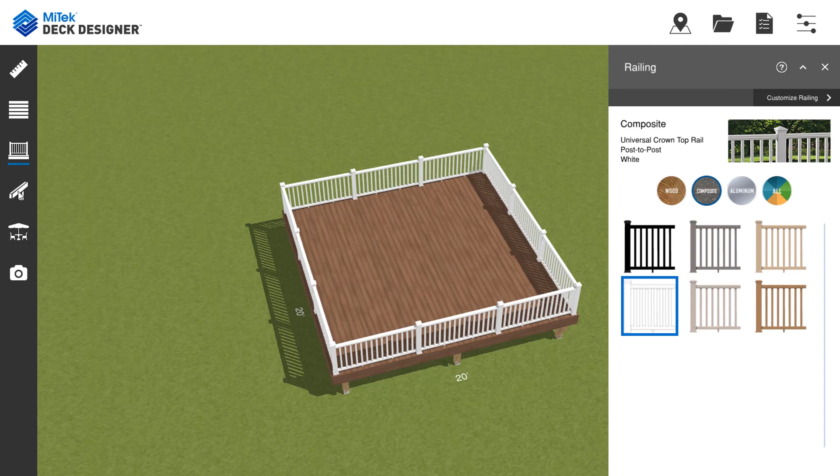MiTek Deck Designer is a free online interactive program that will help you quickly and easily design deck projects of all sizes. MiTek Deck Designer is easy to learn, easy to use, and allows for customization of the deck design with easy-to-navigate menu options.

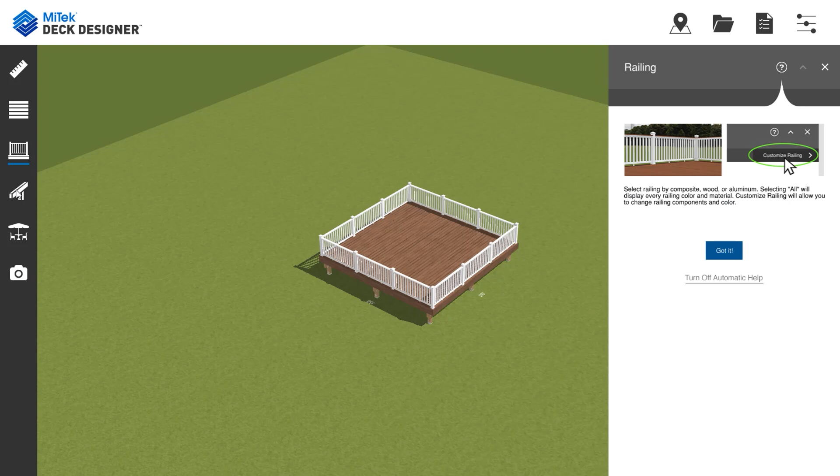The left navigation menu is easily accessible and conveniently arranged in the typical order of a deck design project. The settings menu allows you to set many aspects of the deck design. Here you can set preferences for footing depths, live and dead load values, and even set preferred joist spacing.

To demonstrate just how easy it is to design a deck using MiTek Deck Designer, let's start with a 20 by 20 deck. Drag any of the push-pull points that are highlighted around the deck to adjust the size.

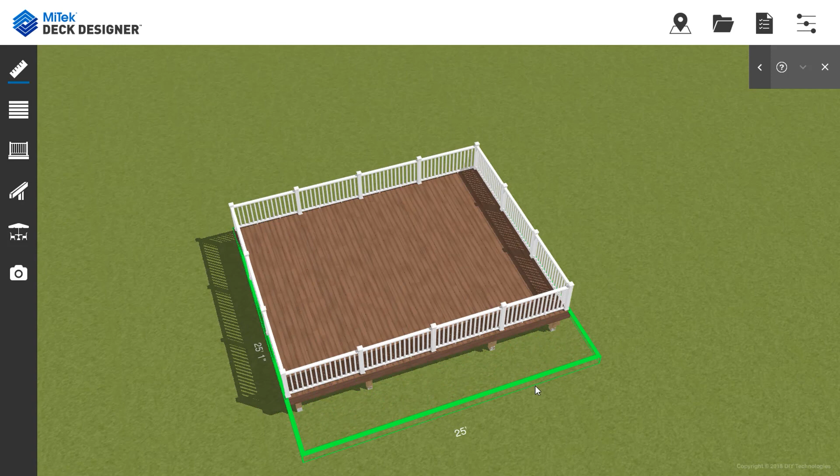Next, select the Set Deck Height tab from the Design menu. Deck heights are in 6-inch increments ranging from 2 feet to 12 feet.

Perimeter shaping tools provide quick options for modifying corners and edges. Options include common perimeter details that, when selected, automatically adjust the railings as well as the structural framing for the deck, including curves and angles. Select any option, then pick the placement point on the deck design.

Interior shaping tools allow for the creation of openings in the deck for trees, pools, or spas by simply dragging and dropping the selection on the deck design. Adjust any of these design elements using the push-pull points.

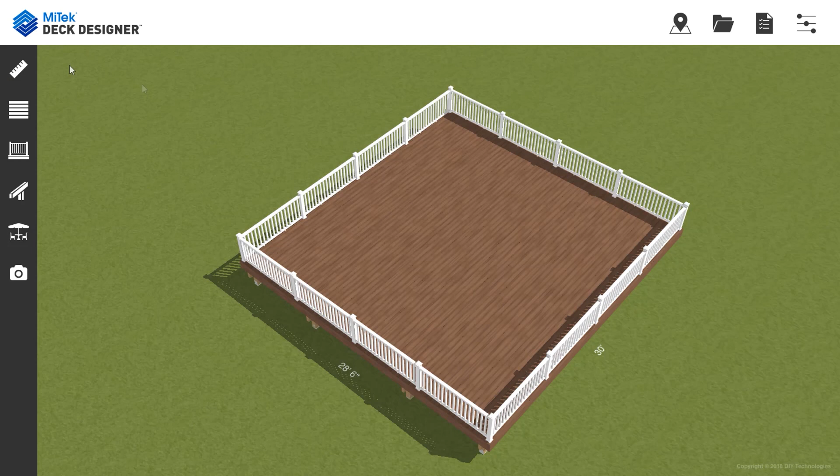Create a second level to your deck design with stepped up or stepped down options.

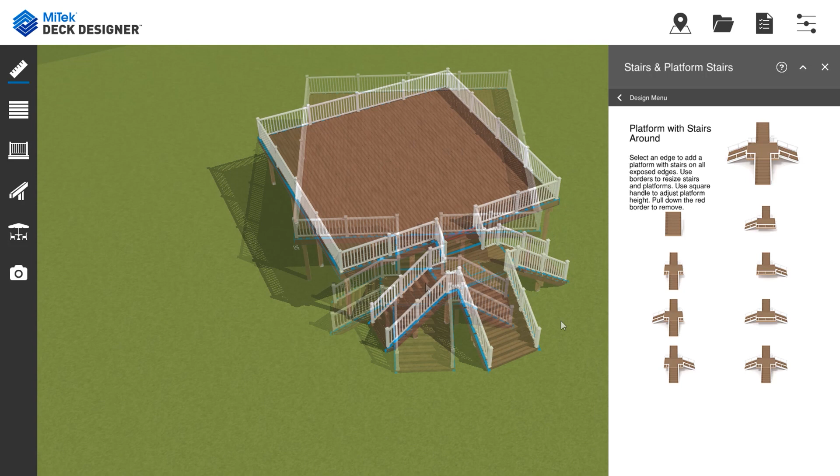Stair locations are easy to create and modify. Select from multiple stair designs, including stairs with landings. Then select the desired edge where the stairs are to be added. To size the stairs, simply click and drag any of the push-pull points in the design window. Landing heights can be adjusted by using the center pull point.

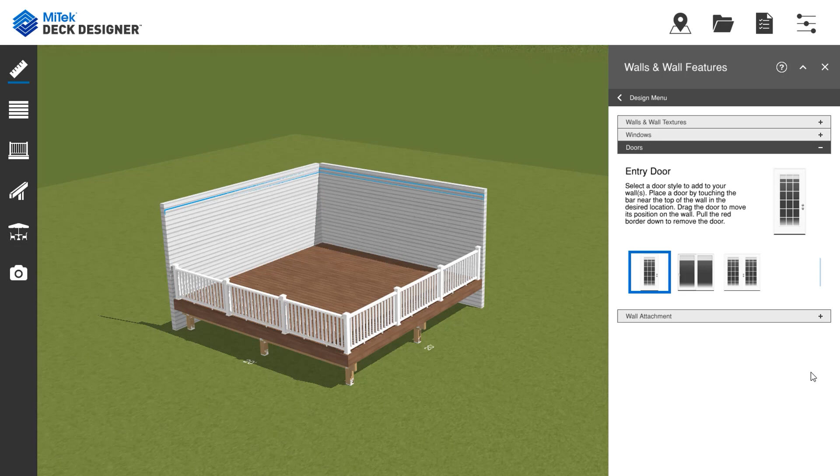Walls can be added with just a couple of clicks of the mouse. Determine whether the deck is to be attached to the house or freestanding. There are several common exterior wall types available to choose from in a variety of styles and colors. Doors and windows can be added to wall sections to help you better visualize the project.

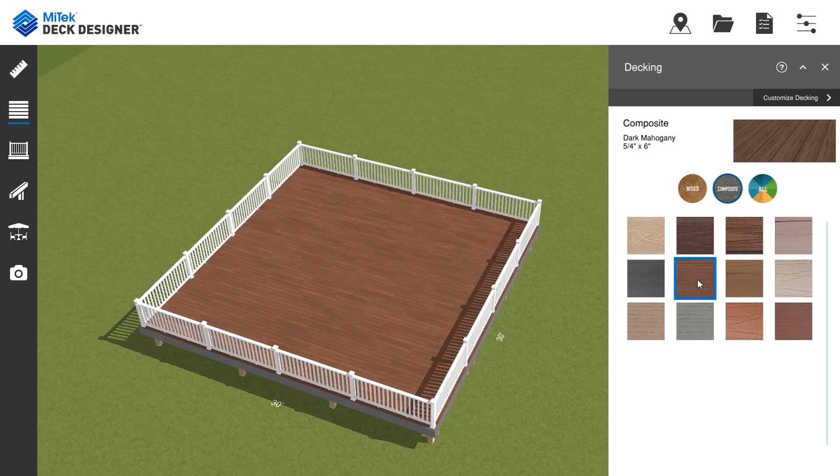After establishing the layout, decking materials and trim details can be modified to allow deck professionals the ability to show various options. Options for decking material include both wood and composite decking. The structure is automatically adjusted for decking materials and direction.

Easily incorporate design details such as planking direction by dragging and dropping design options directly onto the deck. Add a picture frame detail and preview color choices. The 3D perspective allows you to see the results instantly.

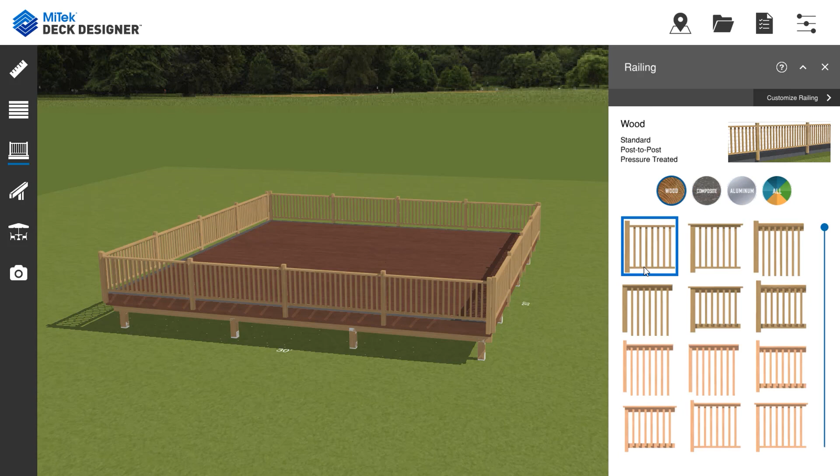Select from common railing types, including composite railing systems and wood railings, including ADA-compliant railing. Select and view various railing styles and color options.

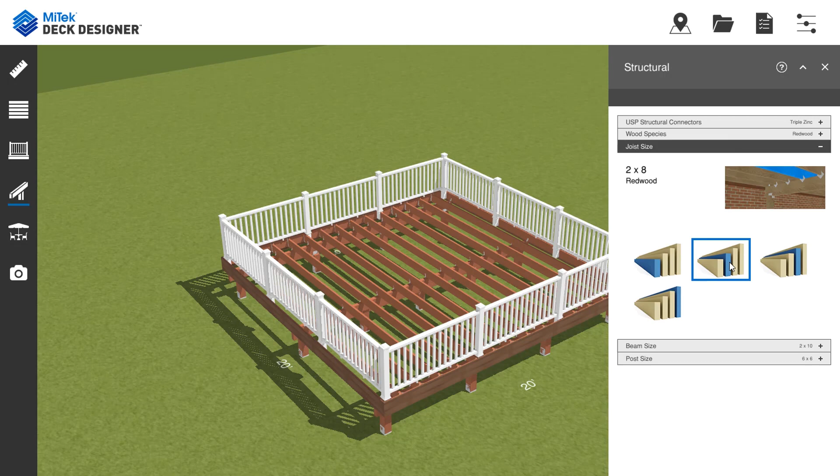MiTek Deck Designer also designs the structural elements of the deck project with the ability to adjust the post, beam, and joist sizes used for the deck structure. Deck designers can determine the best use of material. Instantly see the effects of the number of posts required for the structure with the use of various lumber choices.

Structural connectors are also accurately displayed in the 3D view and automatically added to the material list.

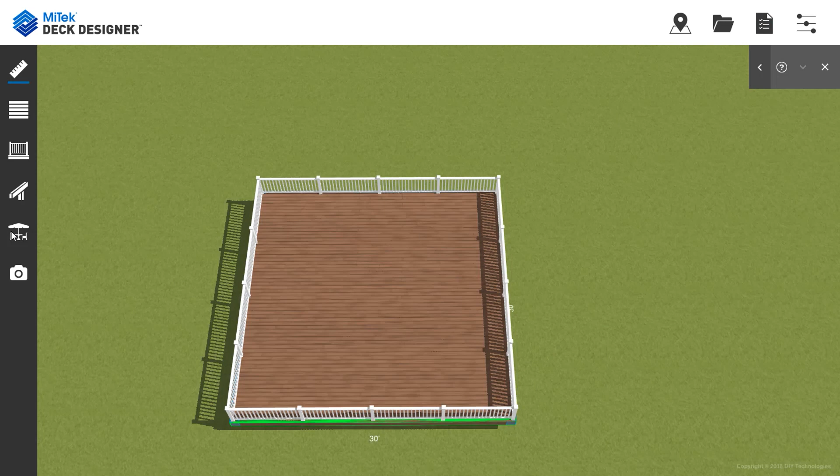MiTek Deck Designer includes many accessories which gives you the ability to visualize the amount of deck space needed for a project. Easily add items to the deck by dragging and dropping selections in the deck design window. Common accessories include seating options, tables, umbrellas, and grills.

The Add a Spa menu allows you to include built-in and freestanding spas in your deck project and automatically adjusts the structure of the deck to accommodate the added weight.

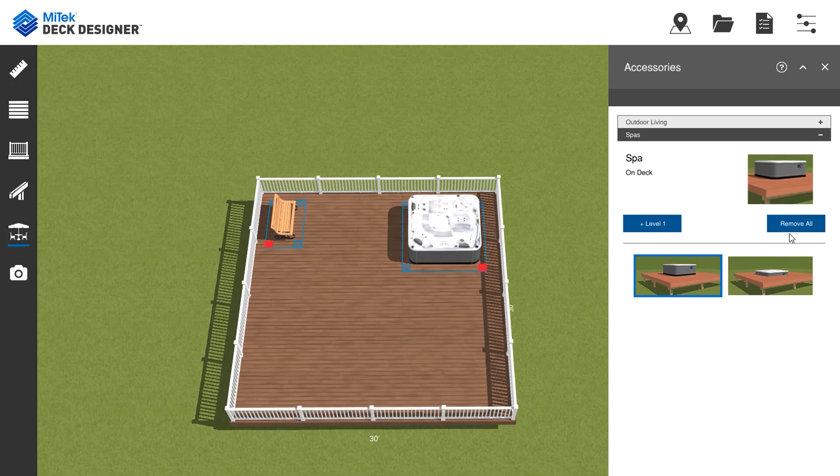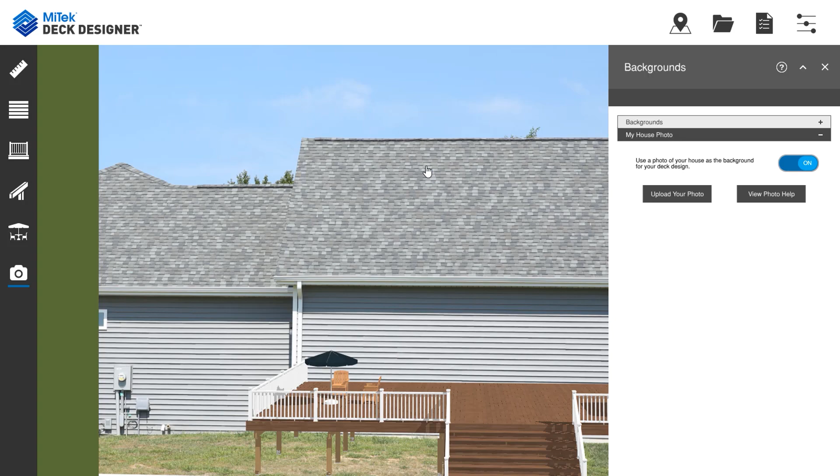Let's personalize our deck by adding a photo of our house to use as a background. Select Backgrounds from the menu and then click on My House Photo. If you've not already uploaded a photo of the area of your house where the deck will be attached, select Upload Your Photo and follow the instructions for uploading your photo. If you have uploaded your photo, simply select the photo you want to use.

MiTek Deck Designer makes it easy to edit any aspect of the deck project. Deck heights, dimensions, and design choices can all be modified by revisiting any of the deck menu options.

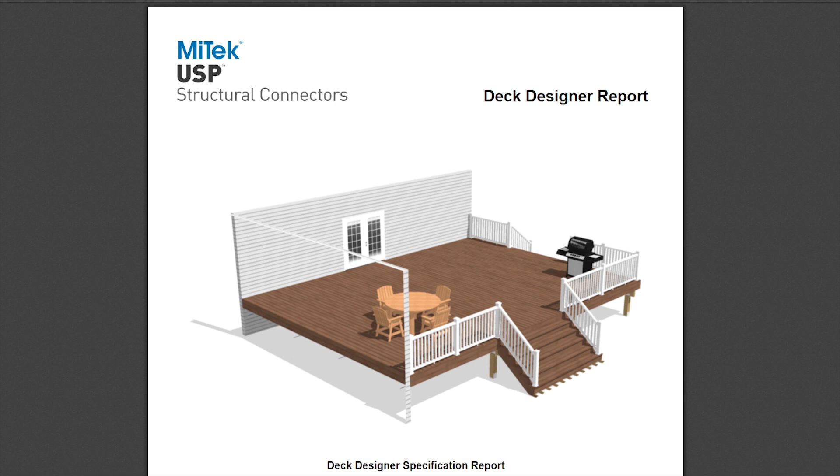Perhaps the most valuable part of MiTek Deck Designer is the ability to quickly generate design documents that can be printed or emailed. When the design is complete, the user can save and view printable reports that include 3D renderings, beam layouts, material takeoff, and cut lists.

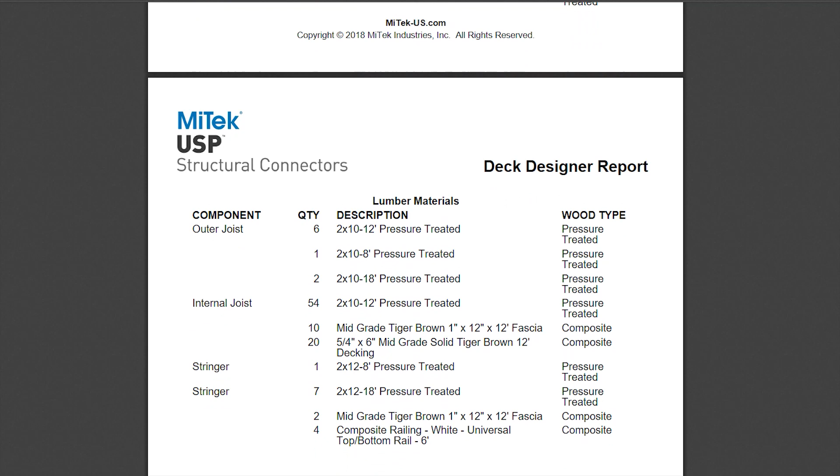Generate a permit information report that includes load values and stress analysis of the deck project, plus additional information commonly required for permit applications. Export the material list as a CSV file in order to work with your material list as a spreadsheet. MiTek Deck Designer makes it easy to plan a project from start to finish.

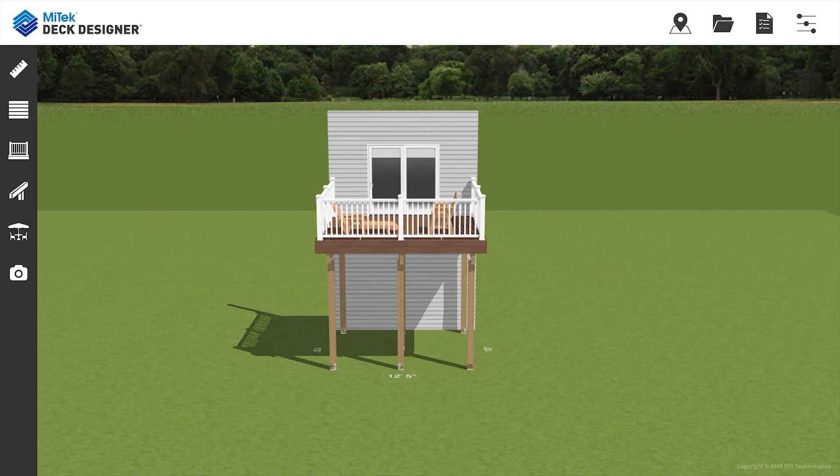From concept to reality, MiTek Deck Designer is a powerful design tool for deck professionals. MiTek Deck Designer is a great way to collaborate and quickly share your ideas. Let MiTek Deck Designer help you get your deck projects off the ground.